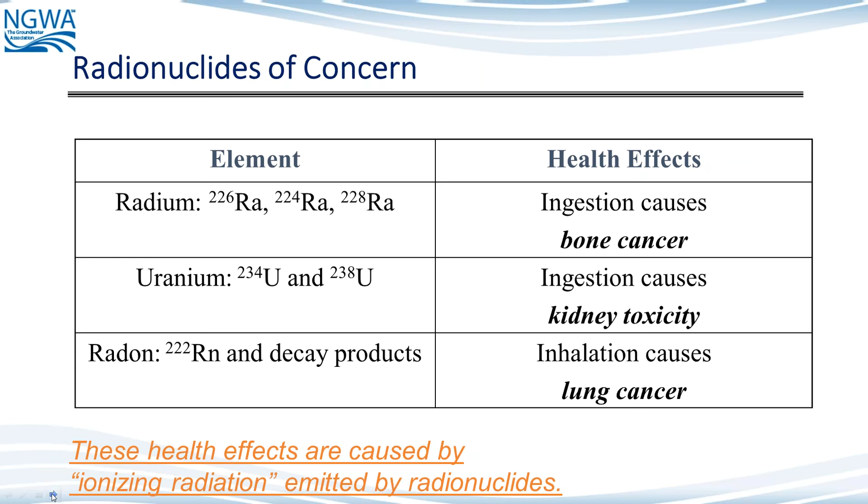As I said, uranium is a naturally occurring metal in the environment, and it, as well as radon and radium, is unique in that it's radioactive. So it has all of the potential issues associated with radioactive materials.

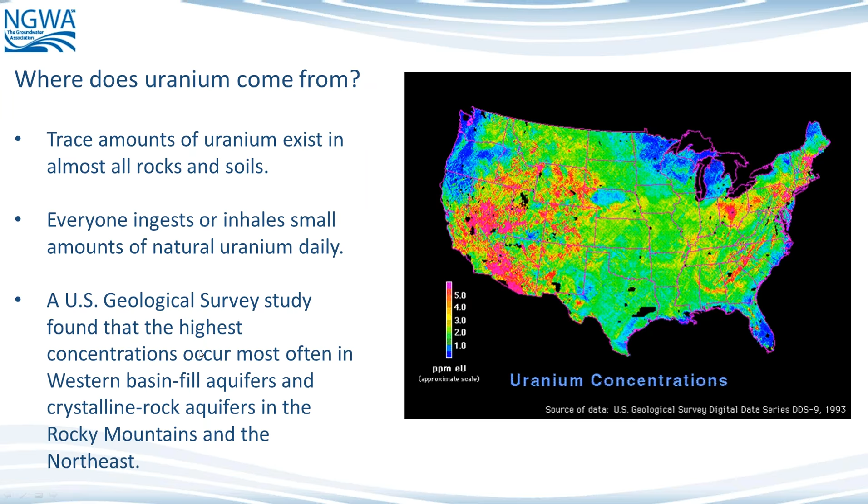Where does uranium come from? Well, as I indicated, it's naturally occurring. It exists in small concentrations in virtually all areas of the United States, and we all ingest or inhale small amounts of natural uranium on a daily basis. In general, the greatest concentrations of uranium are found out in the western part of the U.S. As indicated in the slide, it's the western basin fill aquifers and crystalline rock aquifers in the Rocky Mountains and the Northeast.

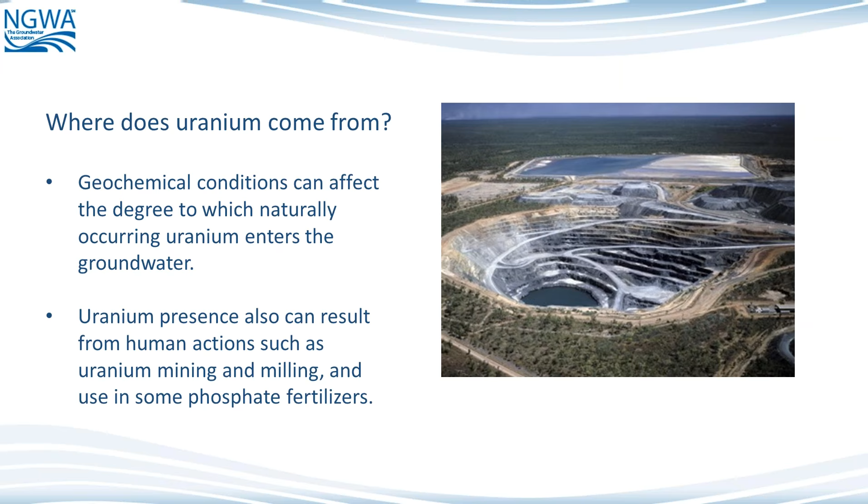The geochemical conditions in our soils can affect the degree to which naturally occurring uranium enters the groundwater. It can also result from human activities, primarily mining activities. The maximum contaminant level is established by the EPA, and it means the maximum concentration of a particular element that can cause health-related issues when present in drinking water. The MCL, as it's called, is 30 micrograms per liter, or 30 parts per billion, or 0.03 parts per million, if you're more familiar with that terminology.

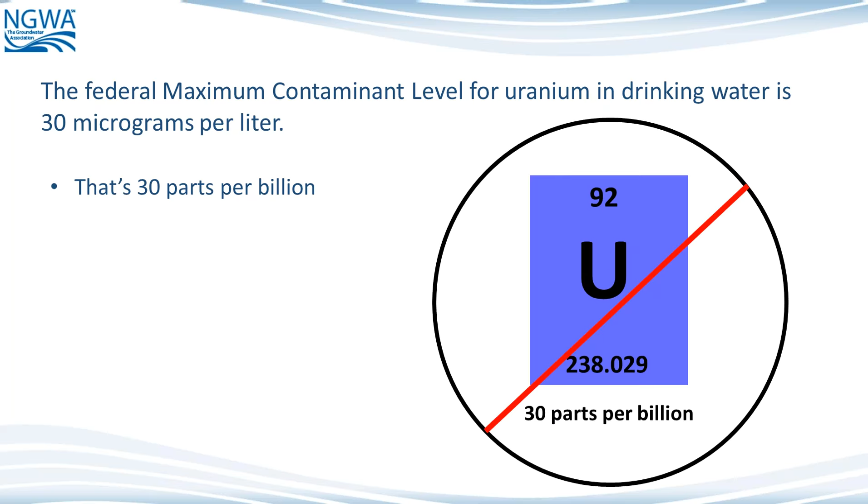Other contaminants can also occur in the presence of uranium. As I indicated a few moments ago, it is very commonly associated with the other radionuclides of radon and radium. Radon is a gas produced by the radioactive decay of radium, which in turn is a byproduct of uranium. These concentrations are so low, and the radioactivity is normally so low, that you can't really buy a test kit to do your own testing. You have to have it done by a qualified laboratory.

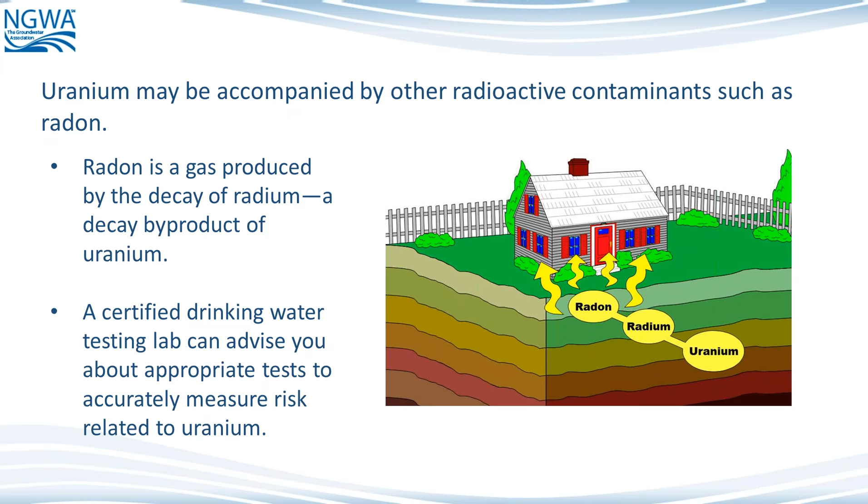Now, with regard to the so-called radioactive issues associated with these radionuclides, there are really three kinds. There's the penetrating radioactivity, which results from what's called gamma radiation. These are the rays emitted by radioactive particles that can penetrate the body and cause all sorts of issues that we associate with the term radioactivity. If it's ingested or inhaled, the alpha particles and beta particles that are released by it can cause health-related issues inside the body.

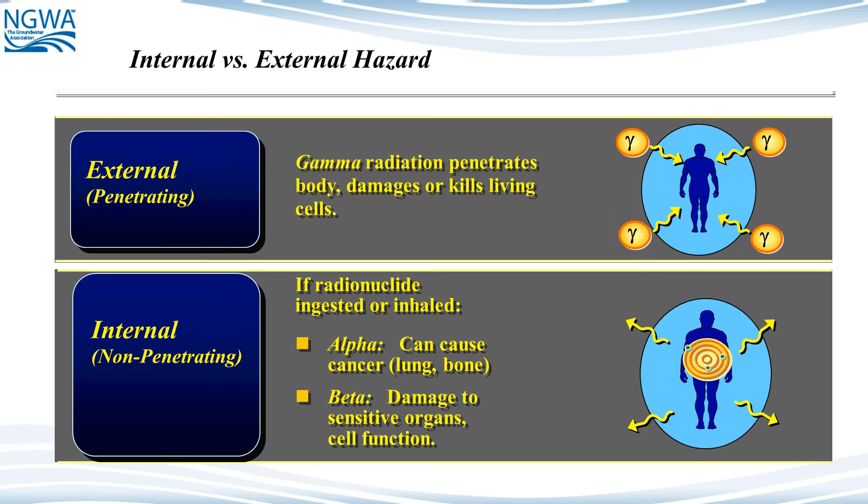Generally, alpha particles are very readily prevented from passage by a material as simple as paper. They're very short range or weak particles. So from a radioactive component such as uranium that's releasing radioactivity, even paper will prevent alpha particles from getting through. Beta particles are a little bit stronger, but even glass or aluminum can prevent their passage. And the gamma rays, which are the strongest in terms of causing health-related issues with radioactivity, still can be held back by concrete, lead, or steel.

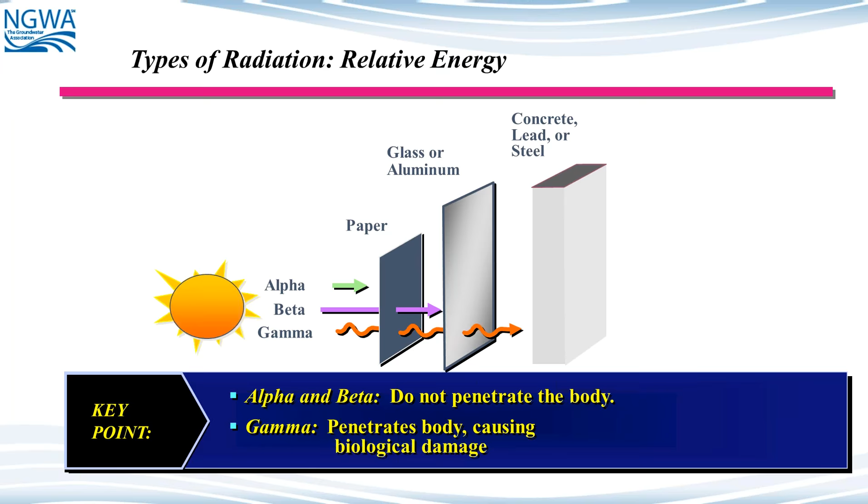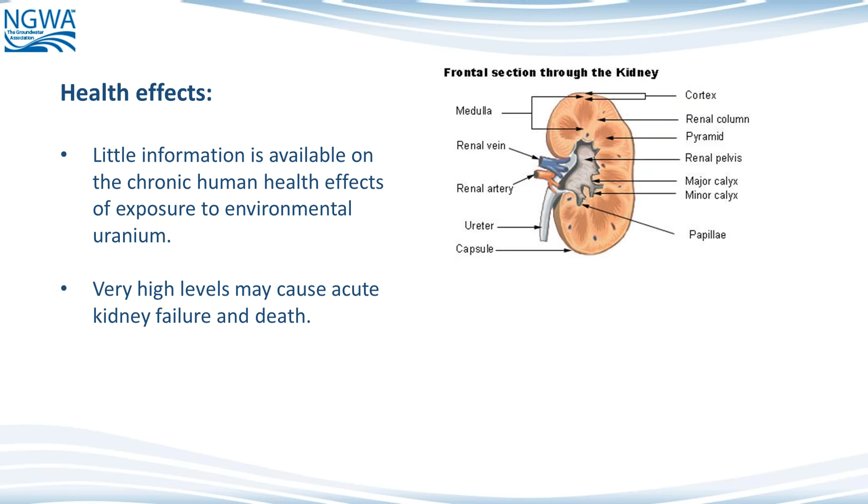Now, as I said earlier, you can't measure it with a test kit, you can't see it, you can't smell it or taste it. So you really have to have a laboratory analysis done in order to determine it.

And if you're having a new well installed or a deeper well installed in your home, if you happen to be in an area where you think that uranium might be an issue or a concern, or if your well contractor has indicated this, then you have a couple of choices. Number one is with the help of your contractor, he may be able to drill down to an aquifer where there are little or no incidents of uranium present.

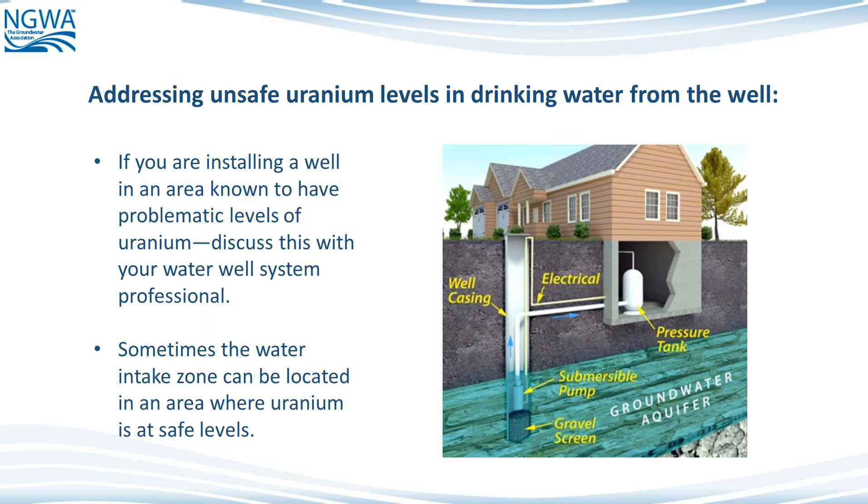And as I said, you can do all sorts of things with the contractor to try to utilize his knowledge and experience to help address this potential problem. A second alternative is if there is uranium in your water, you can quite readily remove it with a number of different treatment technologies, which we will go into in a minute.

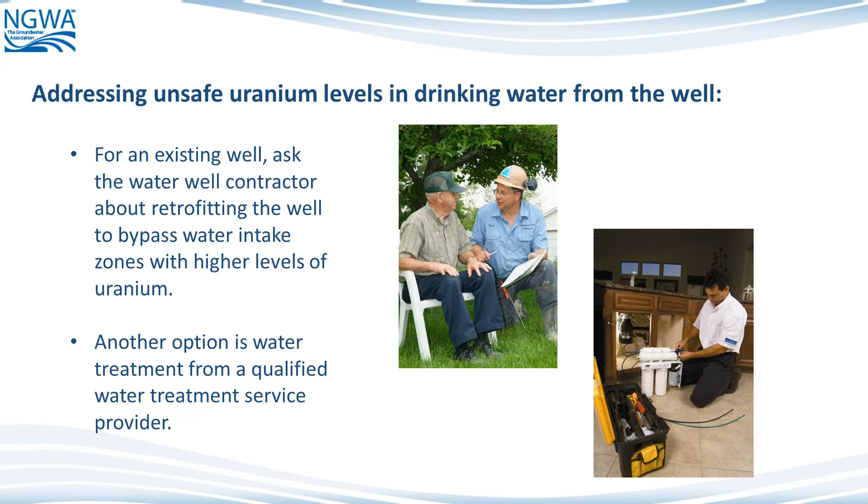Again, I can't underscore enough the requirement to test your water through a qualified laboratory, one that meets the state or federal qualifications, and they can very readily test for uranium, and they will also tell you if it exceeds the maximum contaminant level for uranium.

Now, what treatment technologies can be used to lower the concentration or remove significant quantities of uranium? Reverse osmosis under sink units are very, very widely used because they can remove almost all of the different contaminants that are health related in our drinking water. They are very effective. They last for a long period of time, and they will do a very effective job of removing uranium as well as other issues.

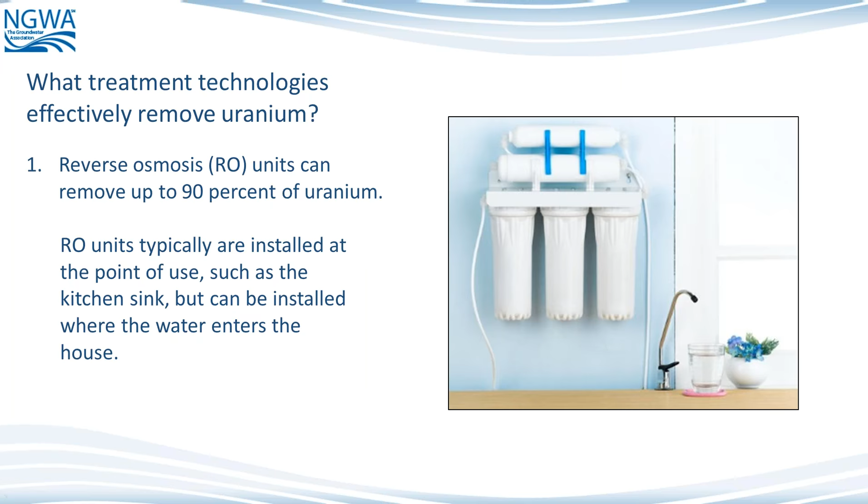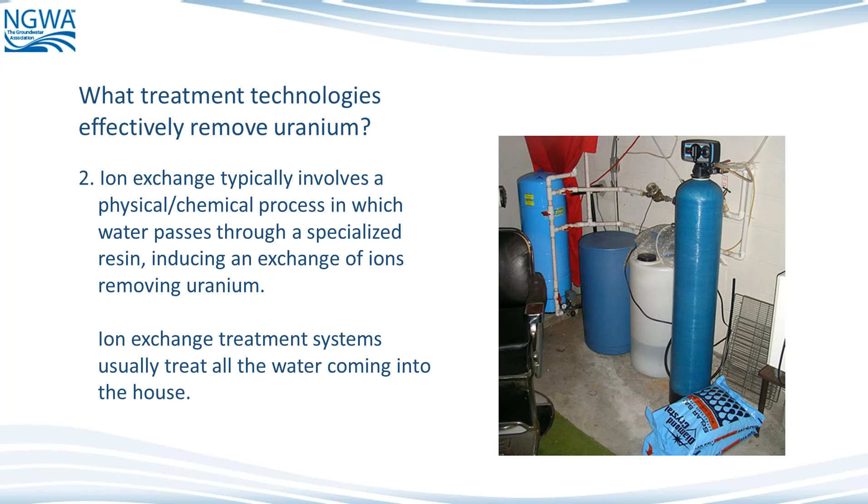Ion exchange and even a water softener will remove a certain quantity of uranium. So if the concentration is extremely low, a water softener, which is represented by this, here is the resin tank, here is what's called the brine tank, and this is where the salt is kept, and here are bags of salt used to regenerate the water softener. This is a whole house, or what we call in the industry a point of entry system. You put the softener as the water enters the house, and it treats all of the household water.

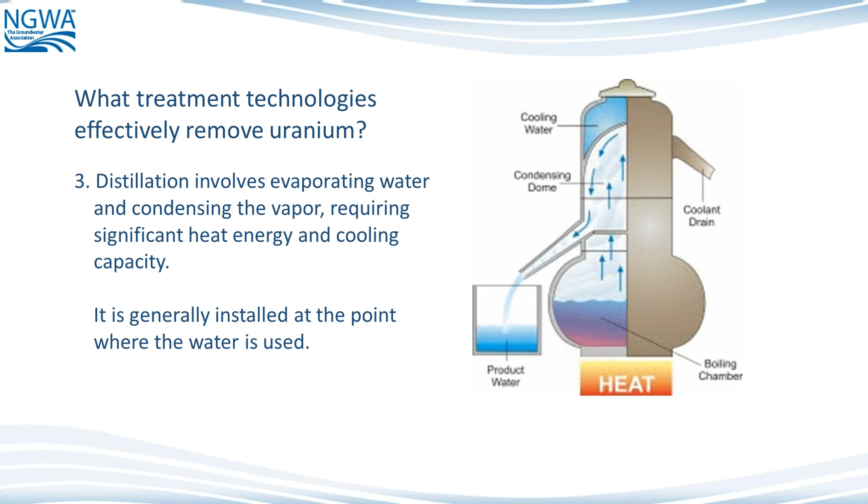So these three technologies are most commonly utilized, and certainly the recommended technologies for reducing the concentration of uranium. One of the problems with uranium is, because it is radioactive, as is radium, for example, when the resin or the membranes require removal or replacement, they may have accumulated enough radioactivity so that they have to be discharged in a hazardous waste landfill, or by an appropriate collection agency. So it isn't just like removing arsenic, for example, where handling is not an issue. These materials could become radioactive to a significant degree and then require special handling.

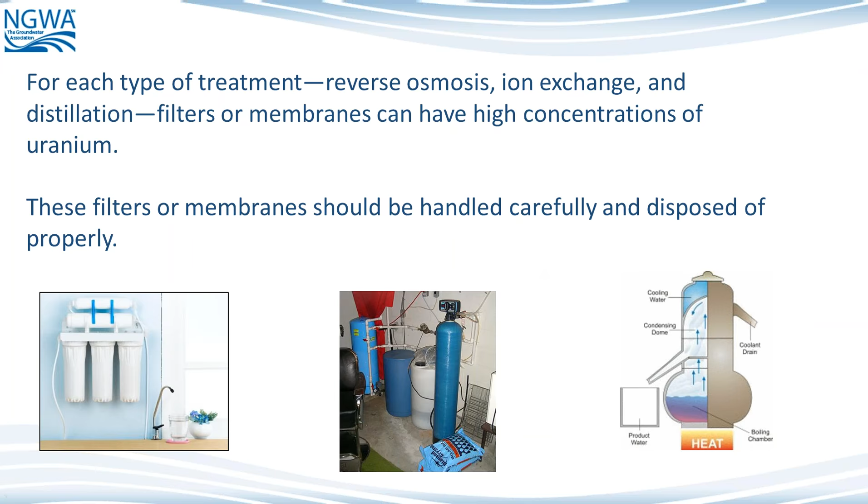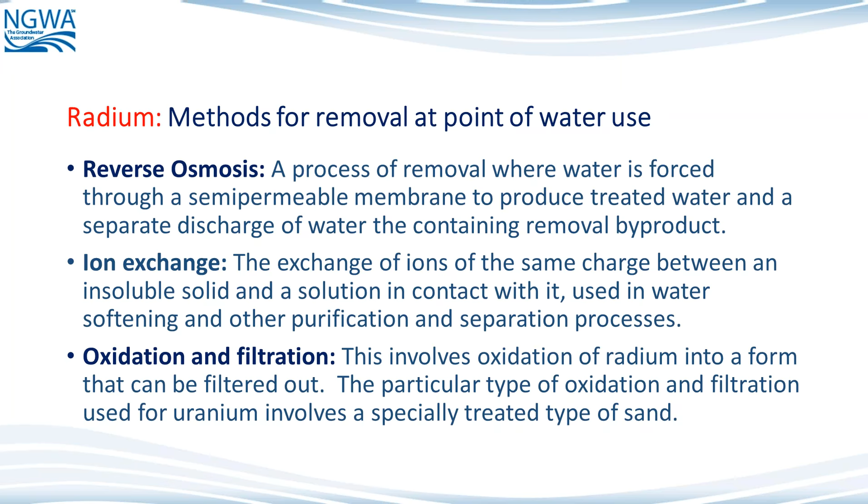Radon. Now, radon is a gas. It's the second leading cause of lung cancer in the United States behind smoking. It cannot be smelled, tasted, or seen visually. Most of the radon issues come out of the soil, not out of water, but you can have radon in groundwater, and because the National Groundwater Association is involved in groundwater, that's what we're really going to talk about here.

But just be aware that a lot of radon can enter a house through a basement, through the soil, and through cracks in the concrete. But for radon in well water, it can be most readily removed by agitation, aeration, and venting. And this is exactly how it can enter the house, as in the water when taking a shower, or some other activity where the water is agitated. The radon can be released in the air. So radon is primarily an issue with breathing because it's in a gas form.

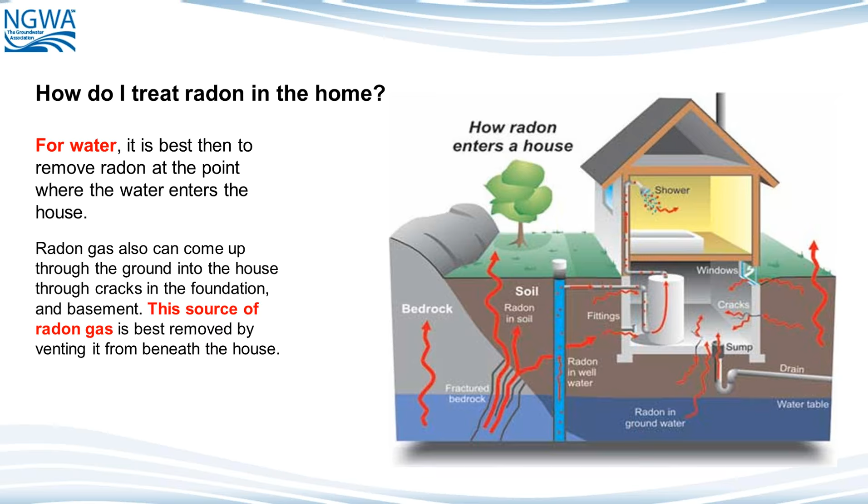Generally, point of entry, or removing radon where it enters the house, is the best approach. So, for example, in the storage tank down here in the basement, this is where it should be removed. Granular activated carbon is effective for removing radon. Carbon will do a good job of adsorbing the gas. However, just as with the case of radium and uranium, the removal device can become radioactive. So this can be an issue.

Aeration, which in my experience is more commonly used, is a matter of spraying the water into a vented tank or using aeration to bubble air up from the bottom of the tank, and then this air which contains the radon, because as I said, it's primarily an issue because it's a gas, can be vented through the roof. So you're just basically removing the radon and putting it out into the atmosphere.

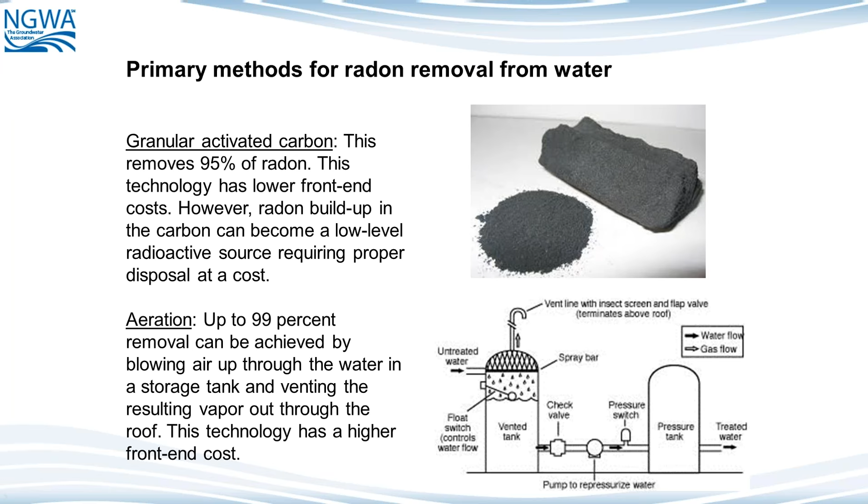This is a commercially available aeration tank that basically uses a pump and an aeration component in the bottom that bubbles air up through the tank, and then this air that is released is vented out through the roof, through here.

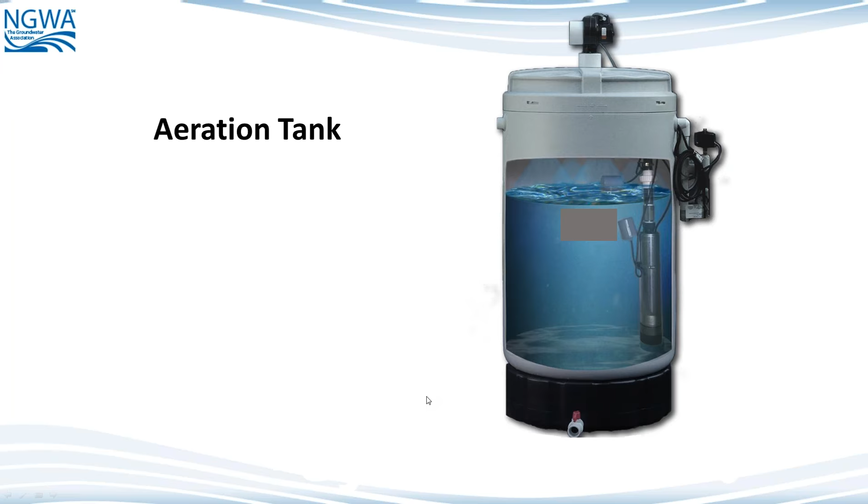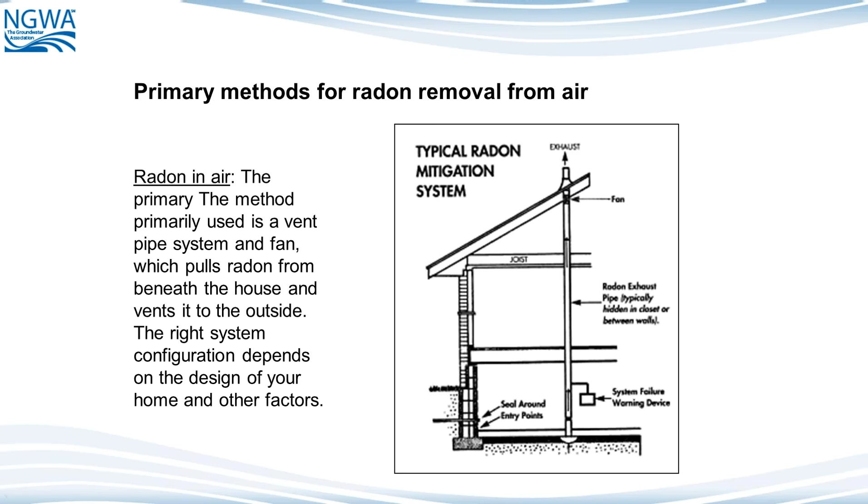Here's another illustration showing whole house venting of the radon. And I might add, this is the most common way of removing it if it comes from the soil up into the house: they put in a blower in the basement, and they basically move the air out of the basement on a continuous basis and exhaust it into the atmosphere. And there are contractors who do this as a living and are very good at it.

With regard to any of the equipment that is used for removing any of these radionuclides we've talked about, uranium, radium, and radon, I think it's extremely important that you only use a product that has been certified with regard to performance characteristics. And the most common certification body is National Sanitation Foundation, and they're the organization that really prepares the standards. And then other organizations such as Underwriters Lab or Water Quality Association are qualified to test a given device for these performance standards, and then they will list them and make them available.

And any qualified device, and I can't underscore enough the importance of using a qualified device, will be listed by NSF or WQA or Underwriters Lab. So it's extremely important that you make sure you get something that works.

And the NGWA has excellent materials that are available to any well owner or anybody else that's interested. It has a private well owner hotline, and it has a tip sheet, and the website above, www.wellowner.org, can be of great help, or the private well owner hotline. So these are some guidelines.